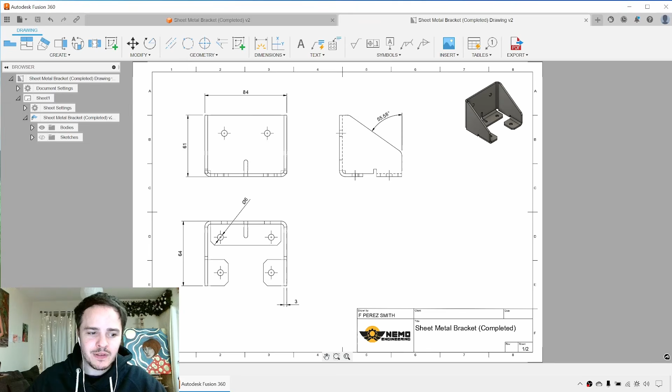What we're going to be doing is we're going to be making a flat pattern from it. And then from that, we are going to be creating a drawing. And the drawing is not only going to include the folded model, but also the flat pattern. So it's all exciting stuff.

Let's dive in. So to create a new file, we'll come along to the data panel and expand it out. And we'll navigate over to the folder that we want to save the file into. Looking good. Next, we'll go and we'll click File, and then click New Design. And here we've got the wonderful blank canvas of a new design.

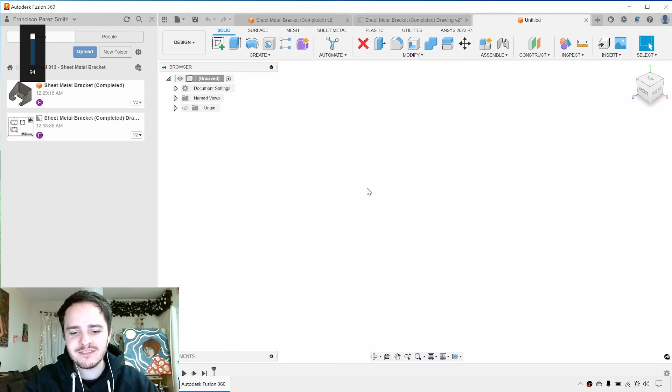Good stuff. Okay, so before we get started, let's go ahead and save it. So we'll hit the diskette or Control S, and we'll call it Sheet Metal Bracket. And then we'll click Save. And we'll close our data panel.

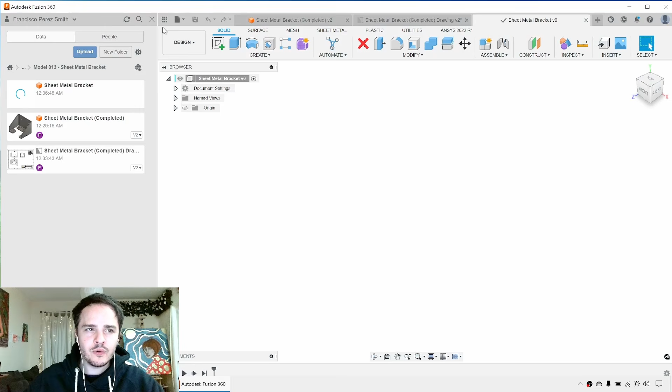Excellent. Okay, so make sure that you're in the design environment. If you're not, click here and click Design. And we'll start by creating a 2D sketch in the Solid tab. So we'll say Create Sketch. And then we're going to click on the XY plane here.

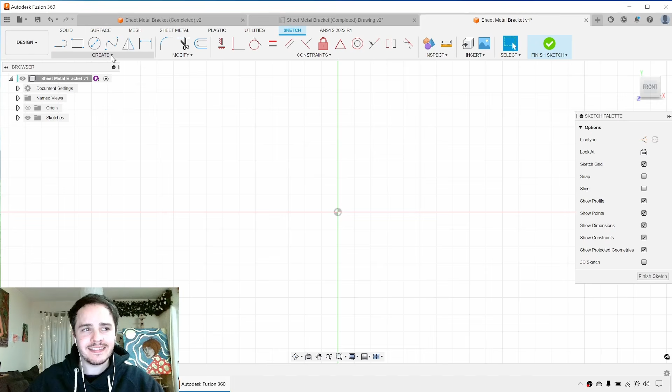Next, we will create a center point rectangle. So to do that, we'll come to Create, and then find Rectangle, and then Center Rectangle. Next, we'll click the origin, and we'll drag our mouse out.

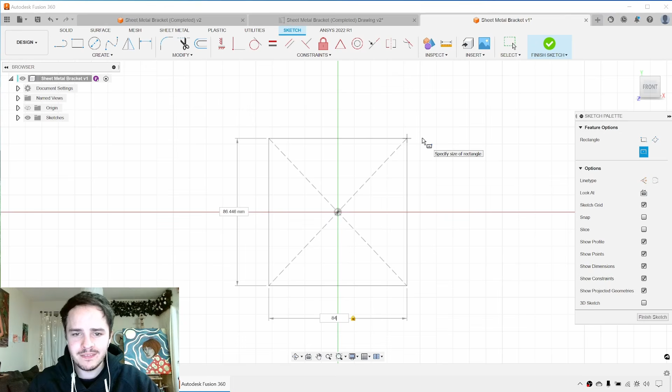Now, we can flick between the dimensions of our rectangle by clicking the Tab button. So we'll make sure that it is 84 wide and 58 tall. And when you're happy with that, hit Enter. Next, we'll click Finish Sketch. And we can rotate our view.

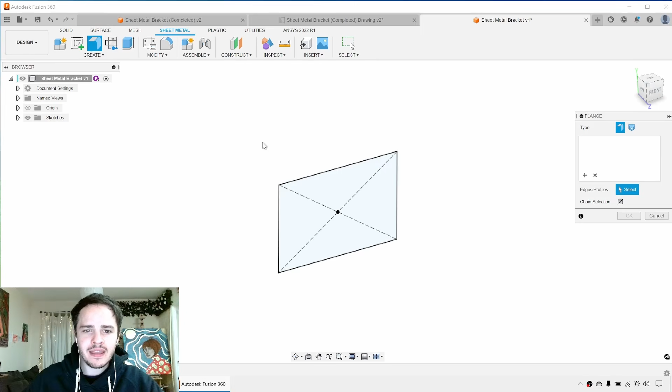Okay, so this is going to be a sheet metal component. So we're going to actually leave the Solid tab and come to the Sheet Metal tab. Next, what we're going to do is click in the Create panel, we'll click Flange. And this will be our first face of the design. And we'll click our profile there.

And before continuing, we have to choose a sheet metal rule. If you've got a sheet metal rule already saved, you can already have the thickness prescribed in it.

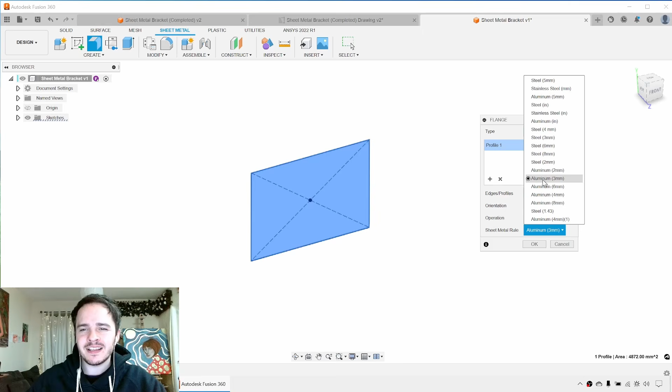But for now, we'll go ahead and just click aluminium 3mm. And click OK. Next, we'll go ahead and click Flange. And we are going to make these two wings that come out from the front. And dragging the arrow, we can create our flanges.

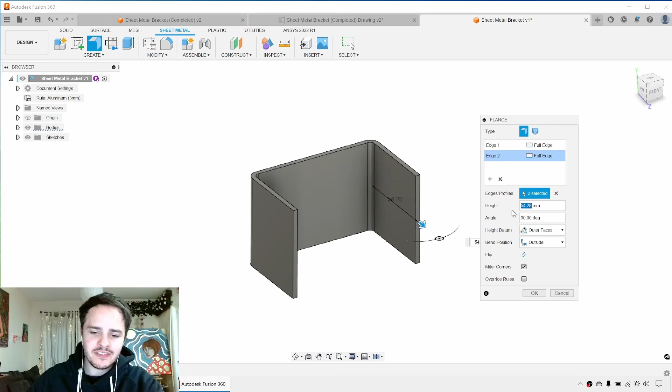Now, the height of it, let's go ahead and make it 54mm. And click OK. So let's look at our completed model. What we've created so far are these flanges before this triangle has been cut out. What we want to do next is create these sub-flanges at the bottom.

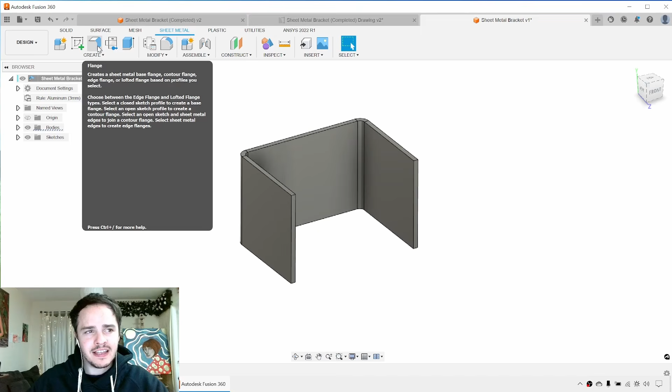So let's go ahead to our design, and we're going to click Flange, and we'll pick this edge here. And if we use this arrow to drag it out, we can see the flange that's being created. So we can go ahead and we can change its extent, so the height of it, to 24mm.

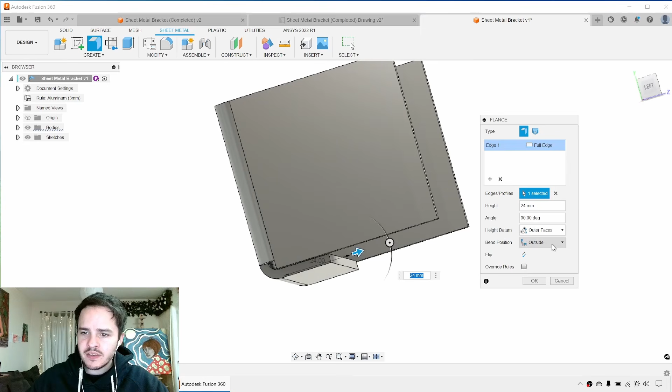And we want to make sure that this flange is coming out of the bottom. The default bend position might be inside, so your flange might look like this. But we want to make sure that the flange is poking out the bottom. So we'll go ahead and change the bend position from inside to outside. There we go. And we can see the flange comes out the bottom of the design.

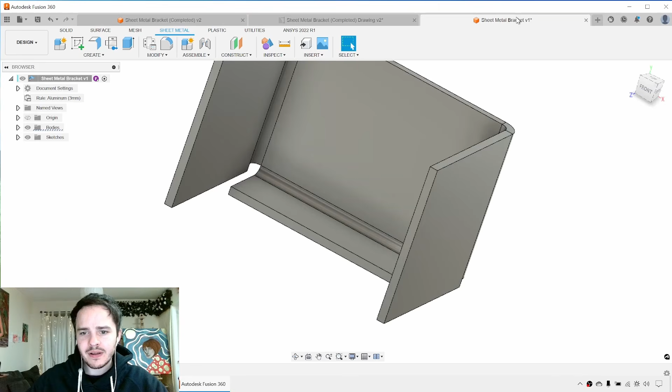Next, we'll click OK. And what we want to do next is create these smaller flanges at the front. So coming to our design, we'll go ahead and again, we'll click Flange.

And we'll pick this edge here. And we'll drag it out as before, 24 millimeters. However, we can see that it's intersecting there, so we're going to have to change something. Let's go ahead and we're going to change the extent of this edge. So where it says full edge here, we'll click two offsets.

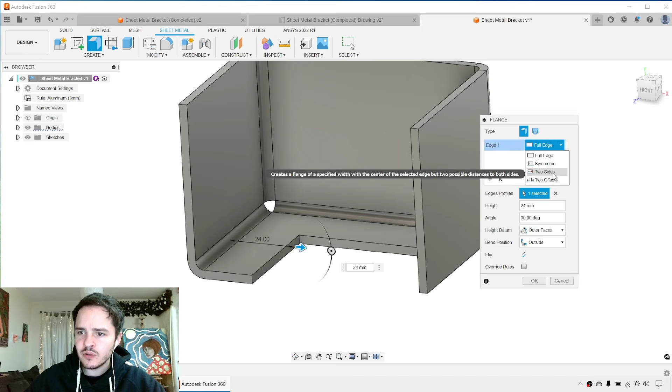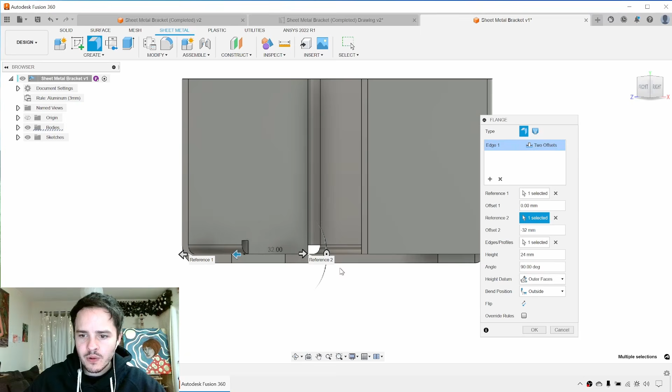There we go. And now we can drag in this edge here. That's it. We want to make sure that offset 1 is 0 and offset 2 is negative 32 millimeters. Good stuff. And as before, we want to make sure that the bend position is outside, so that it's poking out below the design. Good stuff. Let's go ahead and repeat that process for the other side.

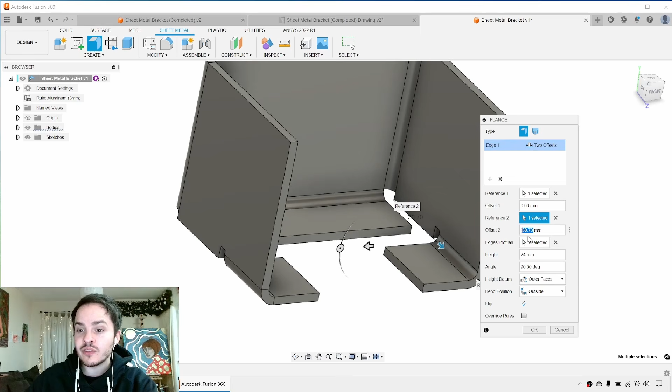Let's go to flange. And we're going to click this edge here. And we'll drag it inwards 24 millimeters. Good stuff. Here where it says full edge, we'll click 2 offsets. And we'll drag this arrow in so that it's offset from that edge 32 millimeters. That's it. Looking good.

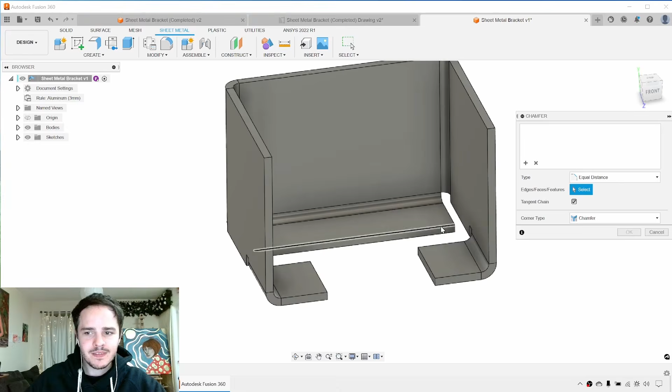Okay, so if we go back to our completed design, we can see that these flanges have chamfers on them. So we're going to add in chamfers. We'll come along to our chamfer tool, so modify, chamfer. And then we're going to pick these 6 edges here. 1, 2, 3, 4, 5, 6. Looking good. And we'll drag them in and make sure that the chamfer is 4 millimeters. And click OK.

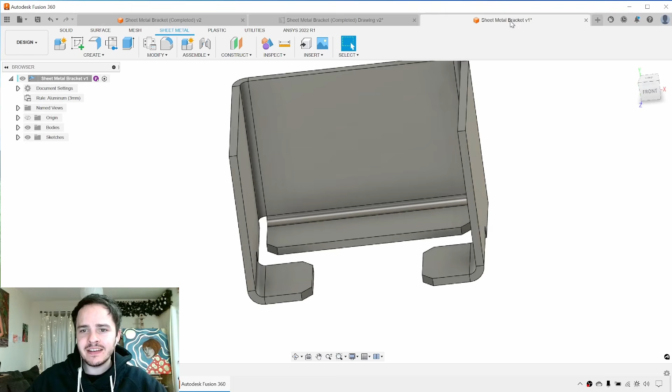Next, going to our completed model, what we want to do is create these 6 holes in it. So 4 at the base here that happen to be lined up, and then 2 on the rear face there. Let's go ahead and create a sketch on any one of these 3 flanges. And we are going to create 4 points. So we'll click point, and we'll place them arbitrarily.

1, 2, 3, 4. Next, we are going to use constraints to make sure that they're properly aligned with one another. Using the vertical horizontal constraint, we can click this point here and this point here, and that will vertically align them. If we have the tool still selected, we can click that point and that point to make sure they're horizontally aligned. This point and this point to make them vertically aligned. And lastly, this point to this point so that they are aligned. If you hit escape and drag around your points, you'll find that they stay aligned with one another. Good stuff.

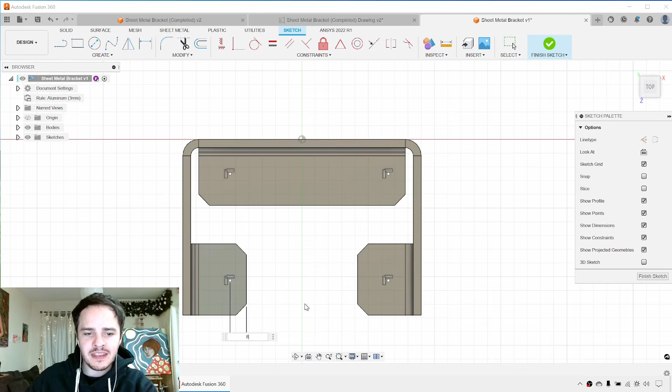We want to make sure that they are positioned. So we'll add in a dimension: create sketch dimension, or the hotkey is D. Now we'll click this point here and this point here, and we'll say that that's 8 millimeters. We'll do the same on the other side, so create a dimension between that edge and that point, 8 millimeters. And lastly, this point here and this edge here, 8 millimeters.

Great. The last thing that we need is to tell these points to be in the middle of these flanges. There's a few ways of doing this. The laziest way is to draw a line from that point there to that midpoint there. Hit escape, select the line, make it construction using X or this button here, and then give it a vertical horizontal constraint. That'll make it horizontally aligned with the center point of that edge.

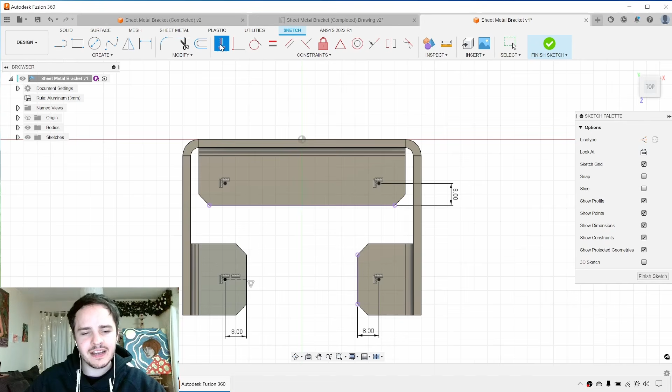All right, so click Finish Sketch, and we will create a hole. Go to the Create panel, click Hole, and pick the 4 points that we drew. 1, 2, 3, 4. For the distance, we'll say All. Make sure that it's simple type with simple tap type, and the drill point doesn't really matter. Make sure its diameter is 6 millimeters. And click OK.

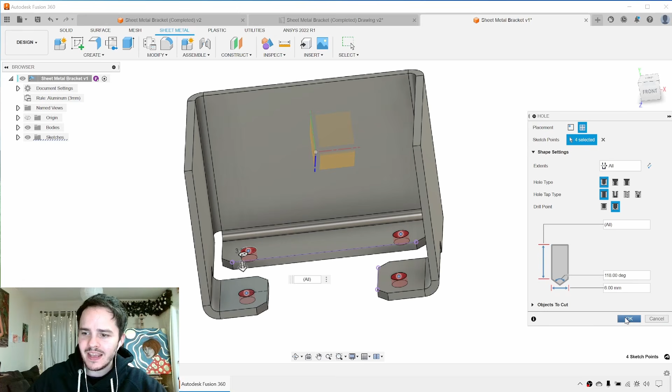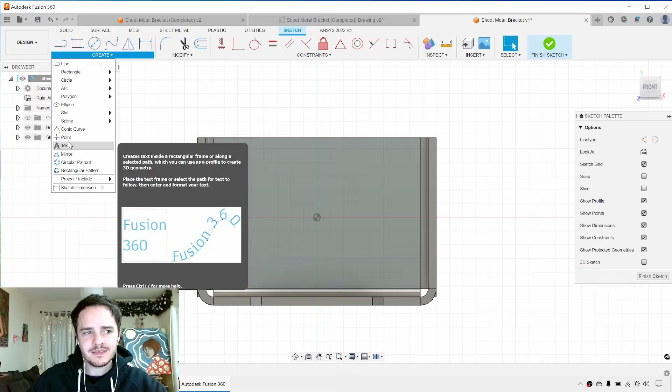Great. Next, we want to create the 2 rear holes. So it's exactly the same process, it's just on the rear face. So we'll go ahead and we'll create a sketch on the back face here. And once again, we are going to create 2 points. So we'll come to create, point, and click there and there.

And we're going to use our constraints. So we'll say horizontal vertical constraint, and we'll make sure that these 2 points are horizontally aligned with one another. Next, we can go ahead and use the dimension tool. So create dimension and make sure that these points happen to be 22 millimeters away from the origin. Probably not the best way of doing this, but it'll do for this model.

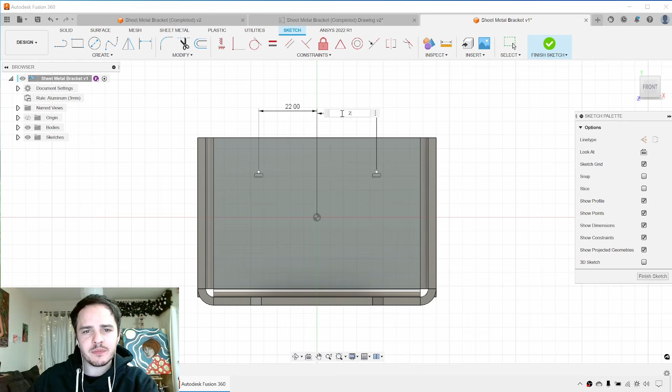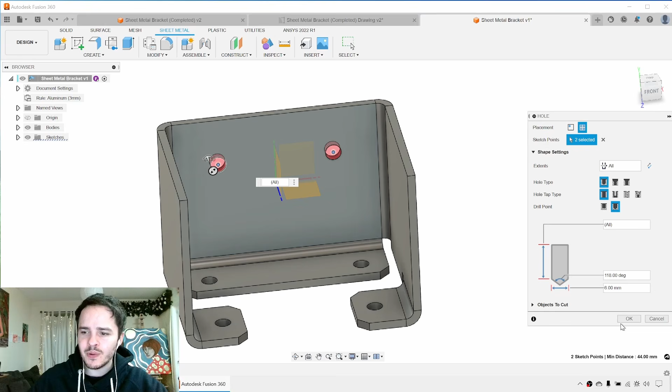Lastly, we want to make a dimension that will place them 18 millimeters from the top there. Good stuff. All right, go ahead and click Finish Sketch. And next we'll go and create a hole. So again, pick those 2 points. Make sure that the distance is all the way through and the diameter is 6 millimeters, simple hole. And we'll click OK. Looking good, looking good.

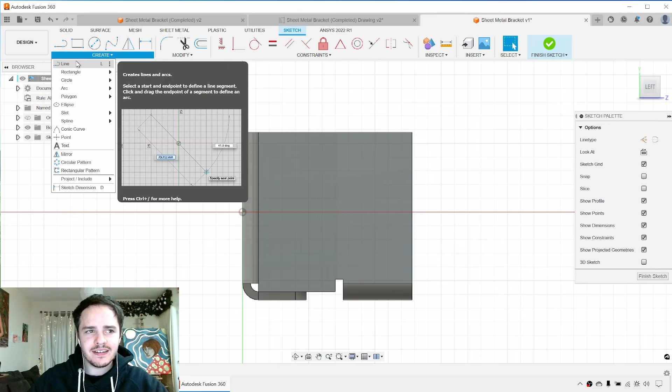Okay, next we're going to make these sloped edges on the side flanges. So to do that, we'll come along here and we will create a sketch on the side of this flange here. And using the regular drawing tools, we'll say create line. We'll hover over the top here and draw an arbitrary line at an angle like this. Okay, and hit escape. Next, we'll use the dimension tool.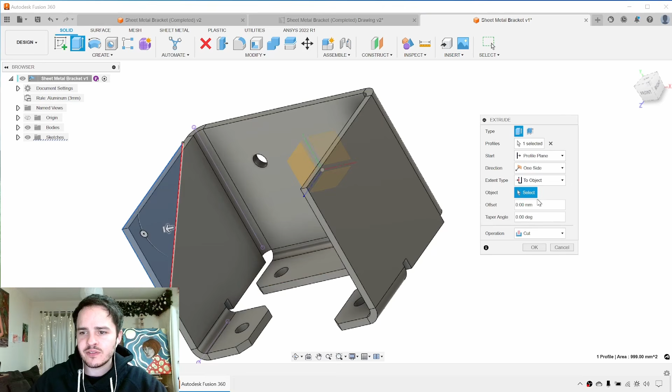And lastly, we'll go ahead and we will say extrude. We're going to cut out this triangle from both of these flanges. So we're going to go to solid and we'll click extrude. And we'll pick this triangle here. And if you're lazy, you can drag it all the way through. But to be formal about it, we like to say extent type distance to object, this edge here, well, face here, and change the operation to cut. Next, click OK, and we would have gotten rid of that material.

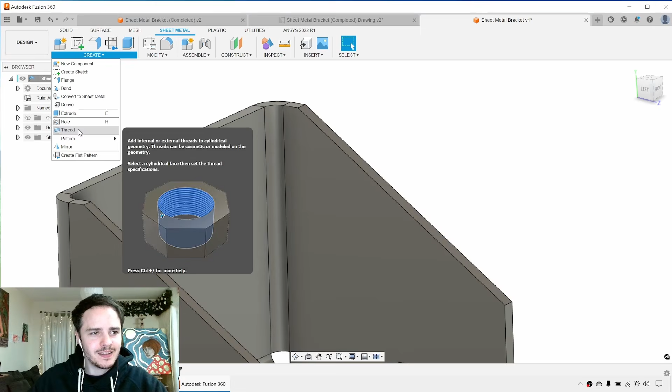Next, we'll go back to the sheet metal tab, and we are going to get rid of these sharp edges by making fillets. So we'll say modify, fillet, and we'll pick these 4 edges, 1, 2, 3, 4, and using the arrow, drag them in and make a fillet of 6 millimeters. Good stuff. Okay, we're just about there.

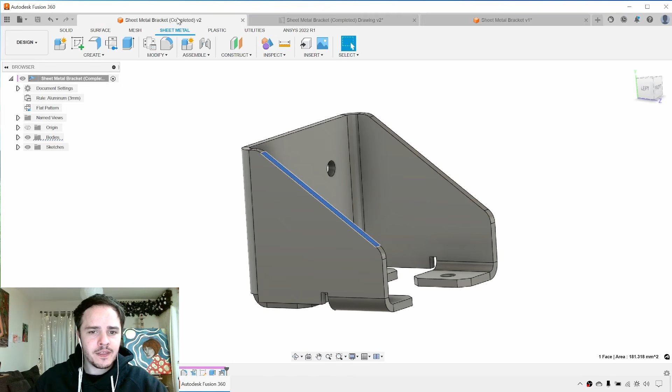The only thing that our completed model has that our current model doesn't is this slot across this bend here. Now, it looks tricky, but I promise you it's not. We'll come along to the sheet metal bracket. And what we're going to do is we are going to unfold this flange here. So to do that, we'll come along and we will click modify, and then we'll click unfold.

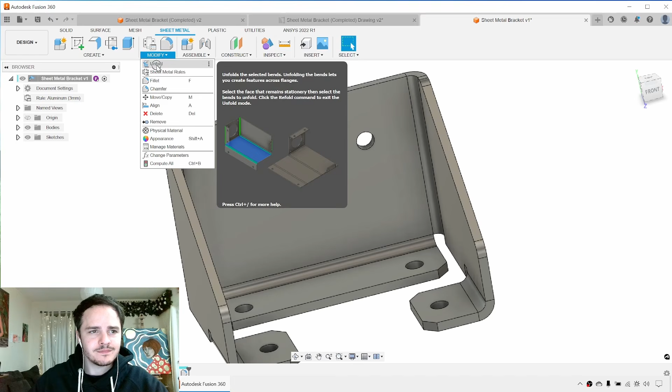Next, click the rear face here. And we can unfold all bends if we want to, but in this case, we're just going to pick this one bend here. There we go, and click OK. So what we've got is our sheet metal partially unfolded.

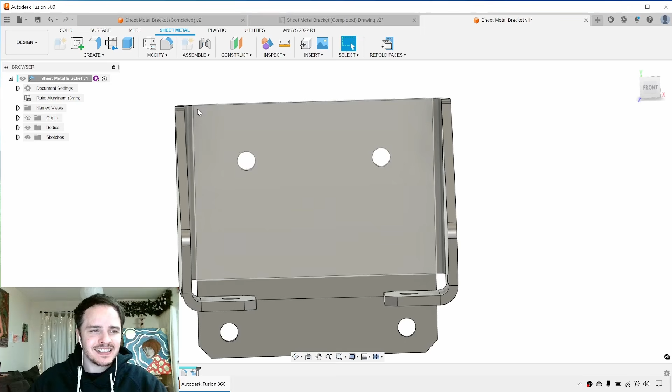Okay, so next, we're going to create a sketch, and we're going to create it on this bend here. And I really want to capture just the center point of that line there so that we can create a slot. So to do that, we'll go ahead and draw a line, and I'll create it from the top of the bend to the bottom. And I'll select it and I'll make it construction. You can make it construction by hitting the X button or hitting this button here, construction.

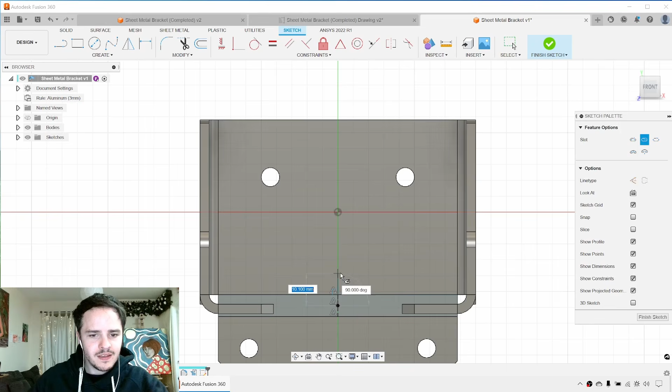Next, let's go and we'll say create a point at the midpoint. And lastly, we'll say create a slot, center point slot from the midpoint there. Oh, did I do that right? Create slot. Yep. Center point slot. And we'll say that that is 12 millimeters and then 4 millimeters wide. So hit 4 and enter.

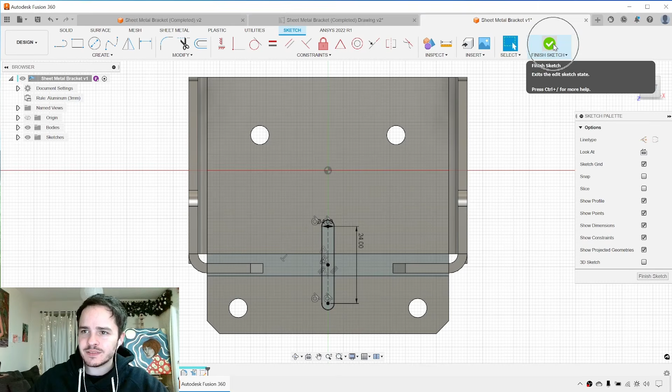It seems to have not paid attention to our length, so we'll go ahead and we will make it 24 millimeters tall. So add in a dimension for the center line there, 24 millimeters. Good stuff. Next, we'll click Finish Sketch, and we'll extrude the slot like it was a regular cut. We'll say Distance to Object and select the rear face there, and click OK.

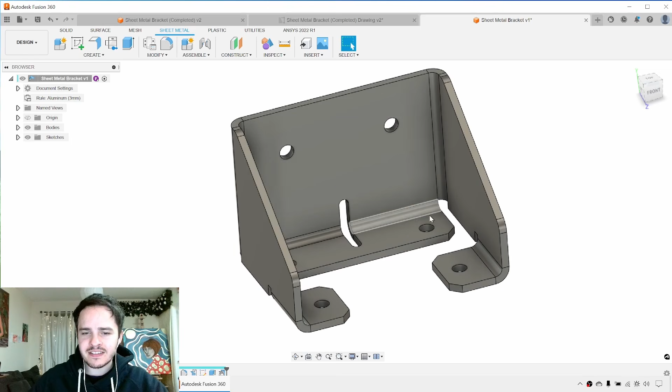And now we will refold our sheet metal. So at the top right hand corner, we can see Refold Faces. Click that button, and it will refold that flange that we unfolded. Good stuff. Okay, so make sure that you save. So we'll click the Save button.

And what we want to do is create a flat pattern of the sheet metal part. So to do that, we'll go ahead and we will go to Create Flat Pattern. Here we have to pick a stationary face. So we'll pick this face here and click OK. And now we've got our flat patterned component.

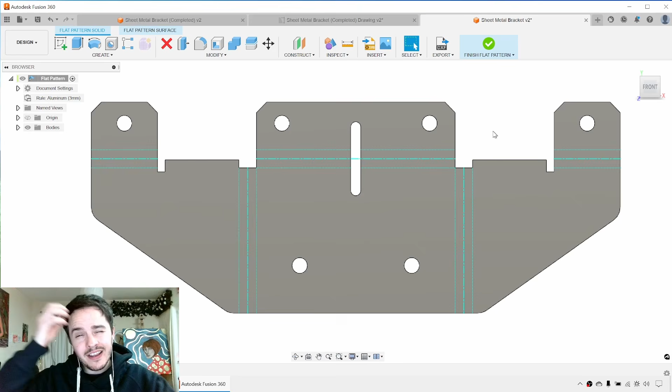Very good. So as a quick aside, I'll show you how to export a DXF if you're cutting this out on a laser. A DXF is just a 2D line drawing that you can then feed into, say, a laser cutter or a water jet cutter or something like that, and you can get your shape cut out. Now, the formal way of doing it is to click Flat Pattern, Export Flat Pattern as DXF here, and click OK, and you can spit out a DXF file there.

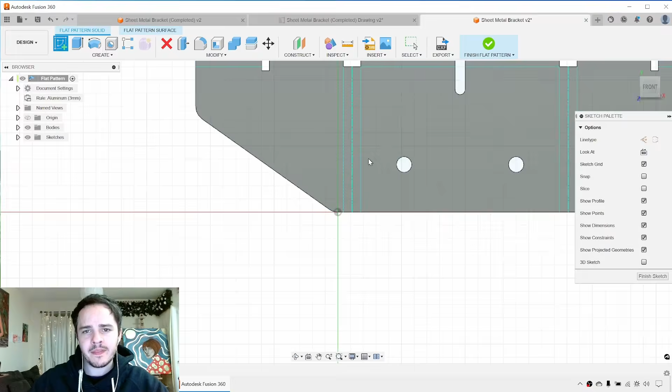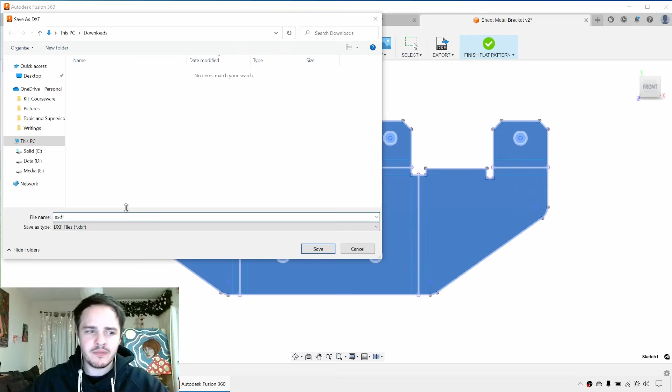But I find a more robust way of doing it is to create a sketch on the sheet metal part there, and then project not only the entire shape, but also each of these bend lines. Now, why go through all the extra effort? I find that by doing it this way, it always creates a perfect DXF. So there we've got our sketch. You can then right-click the sketch and say Save as DXF. And that one works every time. Great. Okay, I'll just delete that sketch because it's not really relevant. So we'll go ahead and click Finish Flat Pattern.

And next what we're going to do is create a drawing. So we'll go to Design, Drawing, from Design. And next we're going to create a drawing, say Create New, Template. If you've got a template, you can pick it from this list, otherwise create from scratch. I'm going to choose my template and click OK.

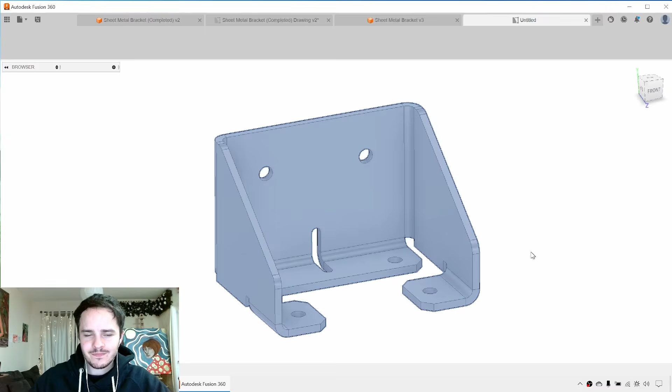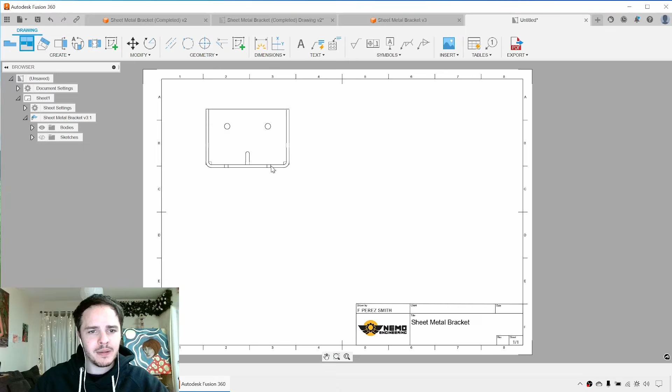Great. And now we can pick our scale. So we might say 1:1. And by default, it's placing down our front view. We'll click there and click OK. You can drag around your view if it's not correctly in place. And next, we'll go ahead and click Projected View. So click Projected View, pick our base view, click below to make a top view, and to the right to make a side view, and in this corner here to make an isometric view.

If you double click the isometric view, you can change it to shaded, and you can change its scale to maybe 1:2 or something like that. There we go. Next, we're going to hit Escape and double click our base view. We want to make sure that the hidden lines are being shown. So go ahead and choose the second icon along Style, Visible and Hidden Edges.

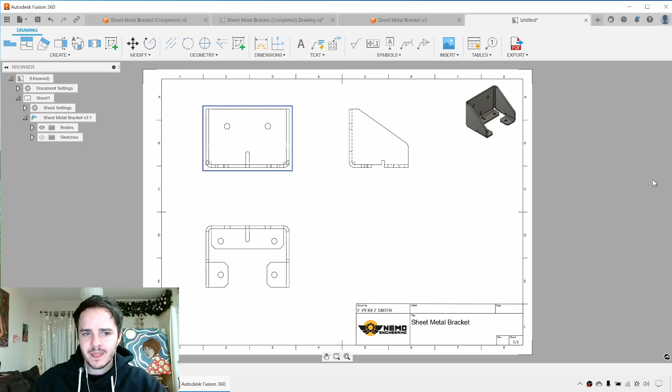Great. Okay, next what we want to do is we want to dimension and annotate this drawing. This is a long, laborious process and it requires a lot of discipline, which I simply don't have. So I'm going to show you very quickly how to make the dimensions, but it's up to you to fully flesh it out. So let's go ahead, we'll add in dimensions, and we'll click this top edge here and this bottom edge here to capture the height.

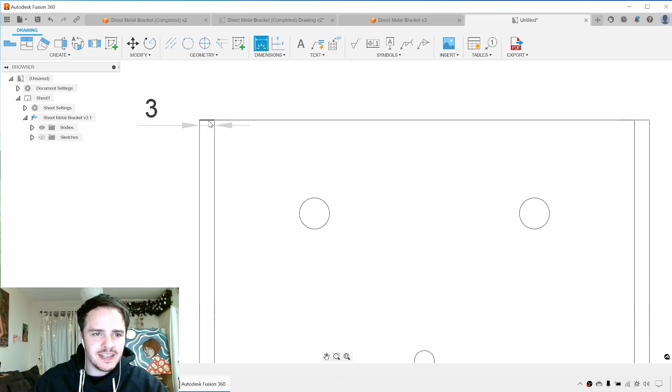Likewise, we can do the same for the width. So we'll come along here, we'll say dimension between this line here and this line here, and we've got our width. And next we've also got our depth, so same thing there.

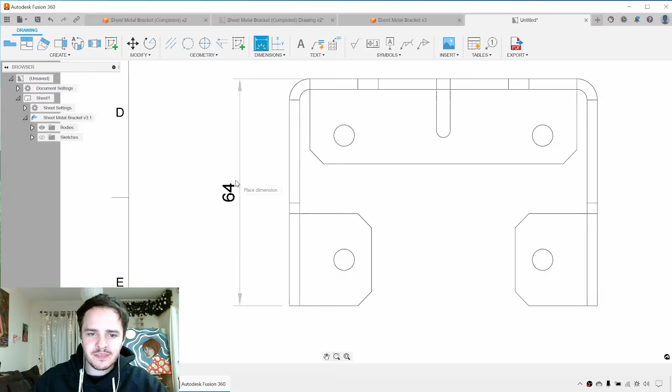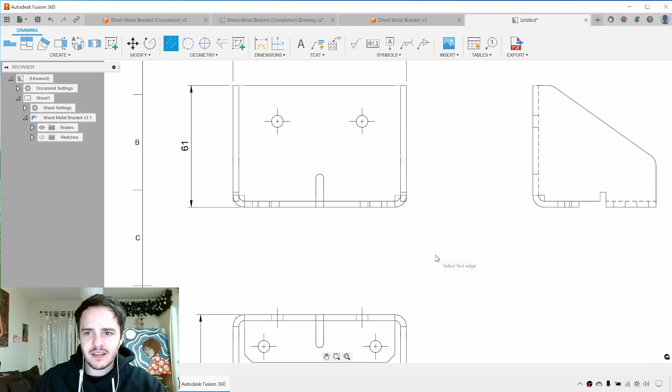To create center marks, we can come along here and click center mark and click our circles, so 1, 2, 3, 4, 5, 6, good stuff. And to do side view center lines, go ahead and click center line, and you can pick 2 edges that represent the cross section of a circle. There we go. Good stuff.

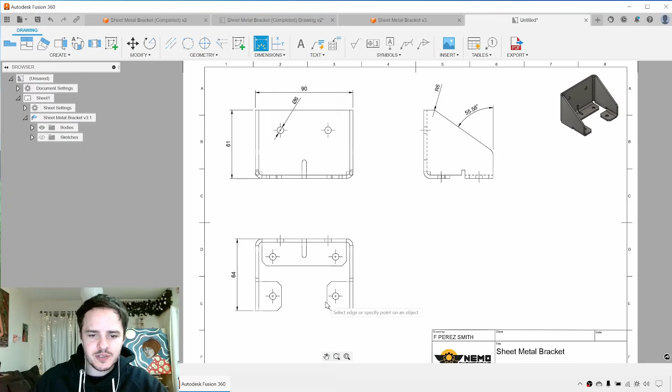You can go ahead and also add in dimensions, like, say, for example, the diameter of the holes and this radius here, and you could even add in an angle there. All the detail required to show a successful geometry. So you might say the depth of that flange there, for example. Good stuff. Okay, so not a great drawing, but it'll do.

We'll go ahead and save that, and we'll call it sheet metal bracket drawing. That'll do. No, I'll call it sheet metal bracket. Good. Okay, so now we've got a bit of a trick. What we want to do is we want to create a second sheet that will show the flat pattern of it. Now, that's not so straightforward, but it is very, very possible.

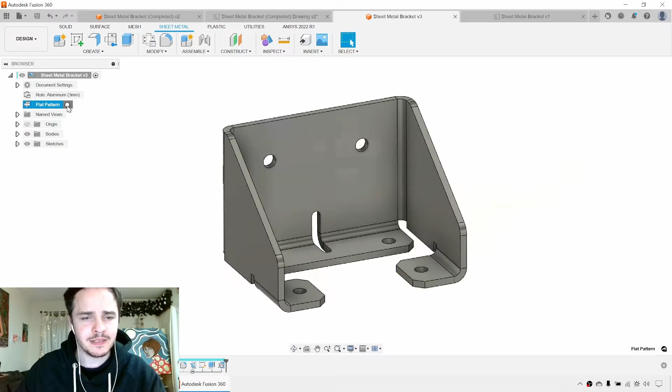So here we'll go ahead and go back to the sheet metal part, come to our flat pattern, activate it by clicking the button next to it. And now we're going to go ahead and say design, come down to drawing, and click a drawing from the design. Now, this is where I will caution you. By default, it wants to create a new drawing.

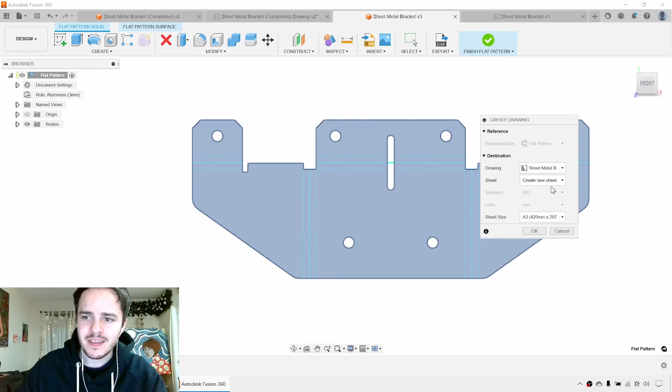However, and this is really, really key to take note, if a drawing is already open in Fusion 360, it will let you pick that drawing from this list, and into that drawing, place this view. So we'll say create a new sheet, and now we'll say okay. And now what it's done is it's gone back to our drawing, it's created a new sheet, and it's placed our flat pattern onto it.

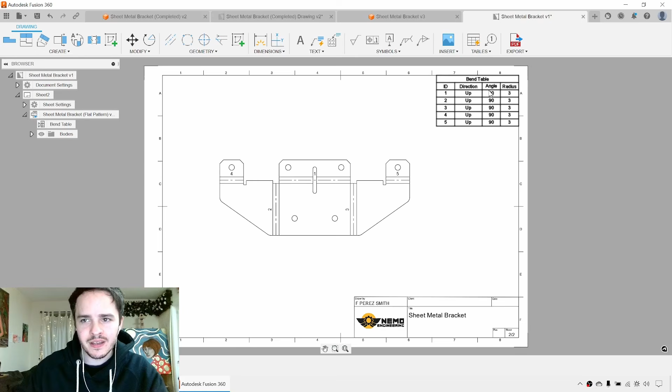Fantastic. All right, so home stretch from here, we just need to go ahead and click table. And if we place the table in the corner, what you'll find is it will annotate each of these bends. And in the table, it will show the bend radius and angle and direction of each of those bends.

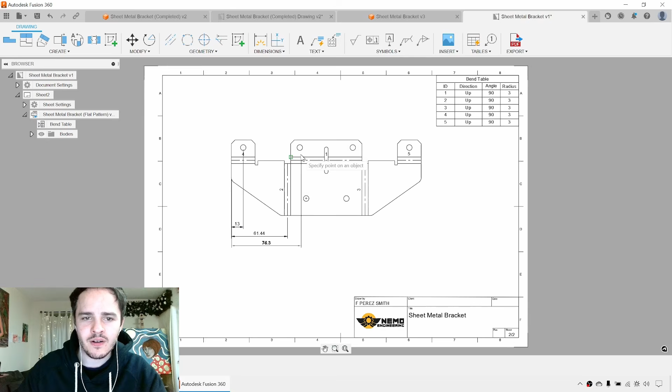Next, we'll go ahead and add in some dimensions and center marks and whatnot. So we could do this manually like we did before. So you could say dimension from here to this circle. But if you want to be lazy like me, you can come along and say dimension, baseline dimension, pick an existing dimension, and then you can create a whole bunch of other dimensions along that axis. Yeah, good stuff. Drawing is boring and should be done as lazily as possible.

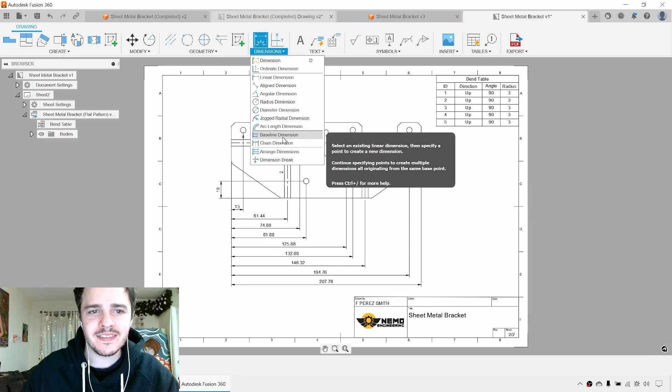Bad opinion. All right, next we'll go ahead and we'll add another dimension. And there we go. And I'll do the same again, dimensions, baseline dimension. And we'll pick that bend there, that bend there, circle there, and the total thing.

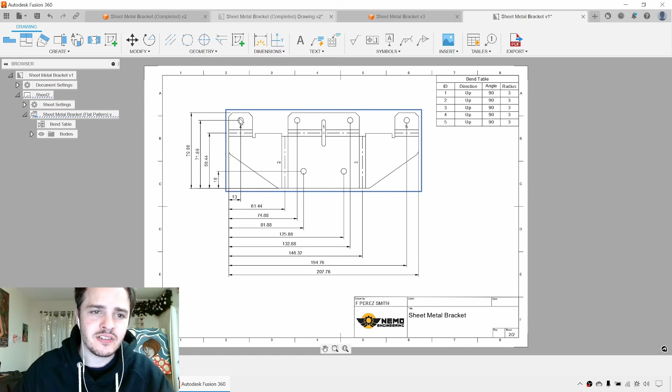So from my experience in industry, when sheet metal people want drawings, what they typically want is, in the flat pattern, the total dimensions of the flat pattern, and the dimensions to each of the bend lines. Additional things like dimensions of features matter less than those two things. Yeah, if you're a sheet metal worker, do let me know if I'm wrong.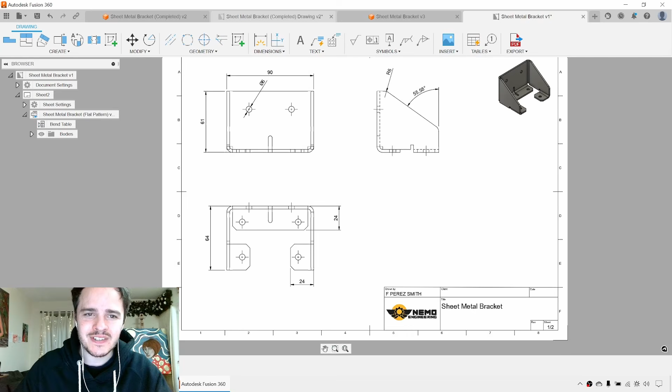Next, go ahead and we'll create our center marks, 2, 3, 4, 5, 6, and you can add in a dimension for the circle there. Wonderful. So now we've got two sheets, one that shows the folded component and one that shows the flat pattern component. Okay, so that's all the time we have today. We created a sheet metal component, we flat patterned it, we created a drawing from it. I think it was very, very fruitful.